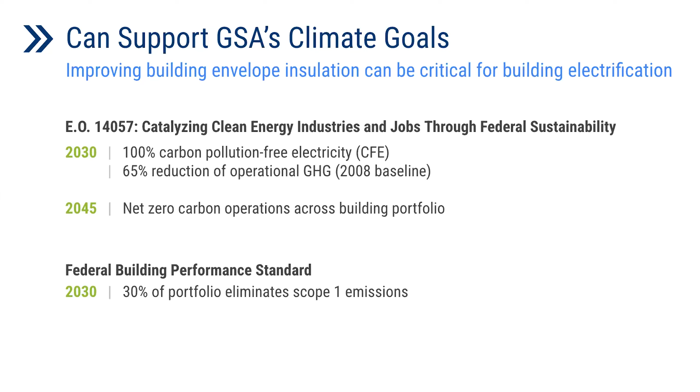Thank you, Aaron and Andrea, for the introduction. My name is Edward Louis, and I'll be presenting the research and findings from this project. This project looked to evaluate these ultralight insulating panels that are mounted on the interior side of primary windows. The design of this ultralight insulating panel strives to maintain the native operability of the primary window.

As Aaron said, improving the performance of windows is super important. Windows have a very long life on buildings, but replacing the primary window is often extremely costly and logistically challenging to do. So even though we know they are a thermal hole in the wall, doing something to improve and reduce that heat loss or heat gain through those windows is often very challenging because it is so expensive. So everybody's looking at how to improve this thermal hole in the wall in a more logistically feasible, more cost-effective way.

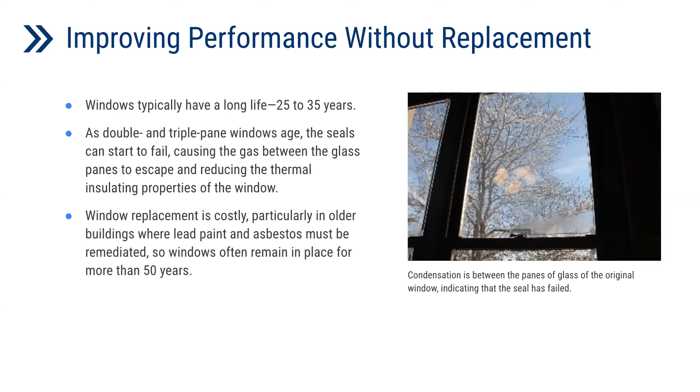So this product is, as you will see, another feather in the cap of solutions that can help achieve that goal. One thing to note is that even though windows have really long lives, particularly the earlier generation of windows - those that are already 25 to 30 plus years old, even if they're double pane or perhaps even triple pane - those early generation windows have seals that are probably starting to fail. As a result, the real world performance, even though you physically see double pane, may not be at double pane performance anymore.

Here's a more detailed look at how this insulating panel works. It operates by attaching 4 corner adhesive tabs that have a mushroom head style Velcro surface on them. Those adhesive tabs are mounted onto the interior glass surface first, and then this insulating panel snaps onto those mounting tabs to secure it to the window.

In a future slide, we'll see that the thickness of this panel is also quite thin, so the clearances enable the window to remain natively operable, which can be really important for certain buildings that need it for egress or climate control.

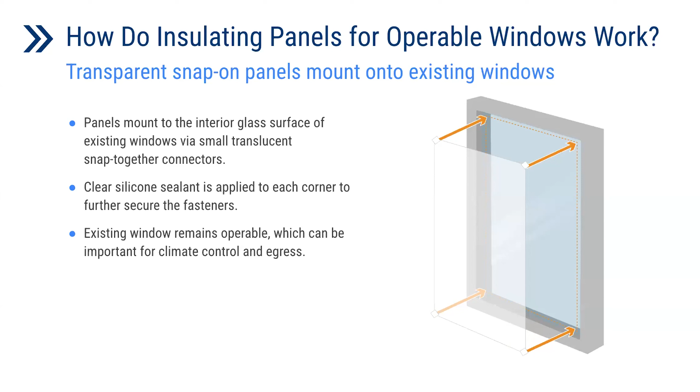The material of this insulating panel is really thin. It's a 20 mil copolyester plastic. When you touch it and feel it, it's analogous to a clamshell takeout box, clear takeout box type plastic. It's about that thickness, maybe just a tad thicker.

The manufacturer, WexEnergy, makes 2 versions of this insulating panel. One has a tint applied that reduces solar heat gain, intended for warmer climates where it's desirable to reduce solar heat gain and increase the insulating value of the glass surface. This project tested the clear version, designed for colder climates where it's desirable to maintain solar heat gain to help reduce winter heating needs.

In the future, this manufacturer plans to make this product from recyclable materials. Currently, it's already made 100% in America. So in terms of sustainability, this product has good sustainability goals.

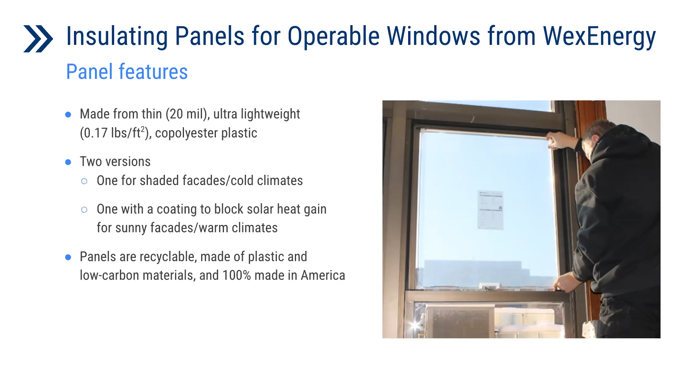Here's an edge view to show how thin this product is. The high profile version that we tested creates a 0.5 inch gap between the panel and the window. Why 0.5 inch? That happens to be the ideal gap or airspace for air-filled insulating. The insulating panel creates a dead airspace between the primary glass and the insulating panel, and if that space is filled with air, the optimal gap for reducing thermal losses or maximizing the insulating value of the panel is 0.5 inch.

One of the cool things about this panel is that it mounts to the glass. So if you have an operable sash and a fixed sash, they're oftentimes at different planes from a certain fixed plane. By mounting to the glass, each individual insulating panel is always optimized at that 0.5 inch gap, which is quite nice.

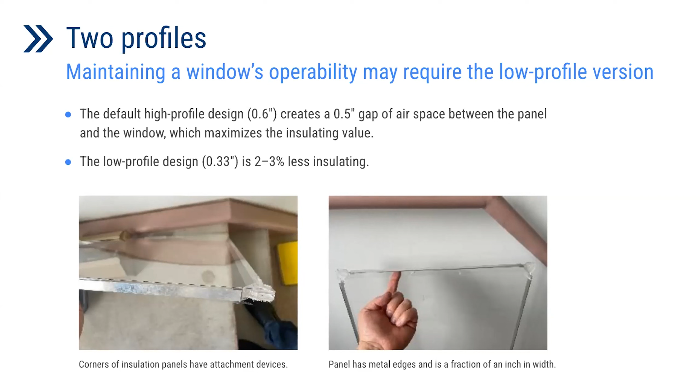They also make a low profile version, which has a slightly suboptimal air gap, and that does affect the insulating value a little bit. But the low profile design is available because some windows need that low profile design in order to have the clearances necessary to maintain native operability.

As I said, the real goal in improving the thermal performance of windows is to seek solutions that you can execute easily or economically, and some of that has to do with logistics. Many buildings are occupied, so they have furniture and people, and if you need to transport something very large into the building, an occupied building can be very challenging to retrofit.

One of the advantages of this technology is that it mounts onto the glass surface. As you can see in the upper right picture, this particular window is actually comprised of multiple glass pieces that are smaller than the total window size. In the window world, that's called multiple pieces of glass that have been muntined or mullioned together. By attaching to the glass surface, each individual insulating panel can be smaller, using the adhesive tab and then snapping that panel into place.

It's a fairly easy install, involving few tools. The GSA staff that did the install took about 10 minutes per panel, including getting the panel to the right place, putting on the adhesive tab, prepping the glass surface for the adhesive tab, etc. They commented that it's probably easier to install than other technologies because it is light, and you can do it even when there's furniture around the window.

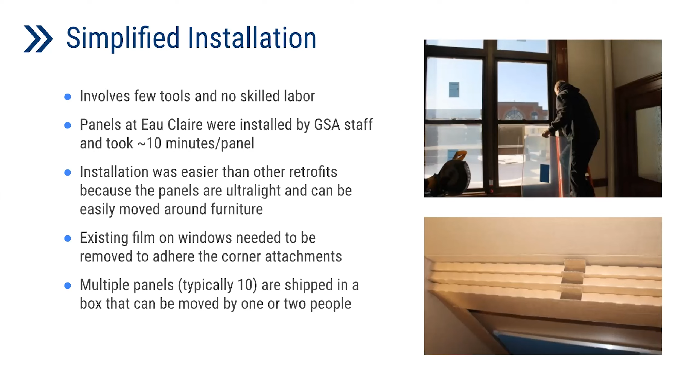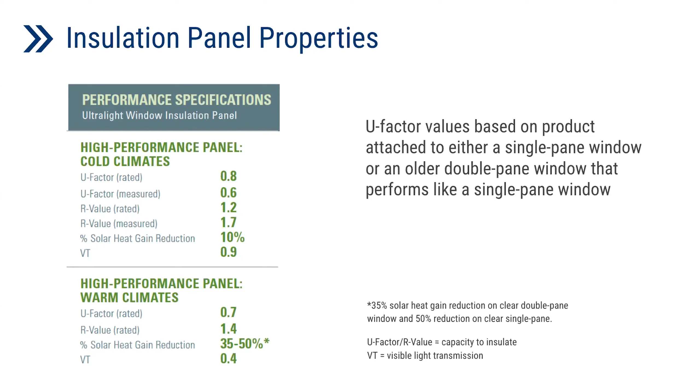So here's some of the performance of this insulating panel. We have, in the cold climate panel, both the manufacturer's rated performance that they did with Intertek, an independent rating agency, and also the measured values — we'll get into later how we measured in-situ U values. The R values are just the reciprocal of the U values. The manufacturer's performance for the tinted panel, designed for warmer climate, is shown in the lower part. Note these values are based on the product attached to either a single pane window or an older double pane window that now performs close to a single pane window. So these are not the performance if applied to a brand new double pane window. Keep that in mind.

We'll go to the next slide. The test facility was the Federal Building and U.S. Courthouse in Eau Claire, Wisconsin. It's a historic building, built in 1909, 37,000 square feet, listed on historic places. The windows in this building were replaced in the 1980s with double pane windows, metal frame, and a decent number of them have failed seals. You can tell the seals have failed — at certain times of the year, they fog a little bit. That's one of the telltale signs. This building is located in cold climate zone 6A.

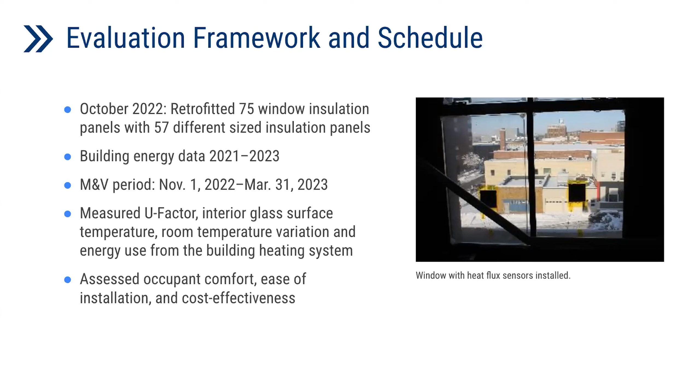Next slide. In October '22, 75 insulating panels were installed. The building has quite a few different window sizes, resulting in 57 different sized insulating panels. The measurement and data spanned 2021 to 2023. We set up sensors to measure the in-situ, real-world U value. On the left-hand side, we're measuring that U value with the insulating panel plus the primary window, and on the right-hand side, we're measuring the U value of the original window without any treatment.

Next slide. And here's the results of the in-field U value measurements. What we found is that the double pane, air-filled windows have a U value around 1. That's surprising because that's not normally the U value of a double pane window. But as noted, these windows are getting old and the seals are failing, and when moisture gets into the air-filled gap between the two panes of glass, the U value increases dramatically. So these double pane windows are actually performing closer to single pane. But with the insulating panel attached, the improvement in U value is about 52%. So a great improvement, and that's what we found.

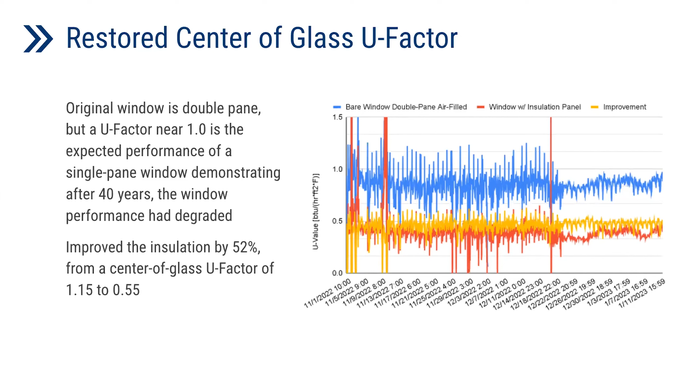Next slide. This building also has interesting building controls — it has a very aggressive nighttime setback, into the upper 50 degrees, which is a significant drop from your typical 72 during the day. That creates a very interesting natural experiment we can look at: how the perimeter rooms cool off and the rate of cooling. We found that once the insulating panels were installed, the rooms cooled off slower because the heat loss through the windows is slowed down. That decrease in the rate of cooling was about 31% during the winter months.

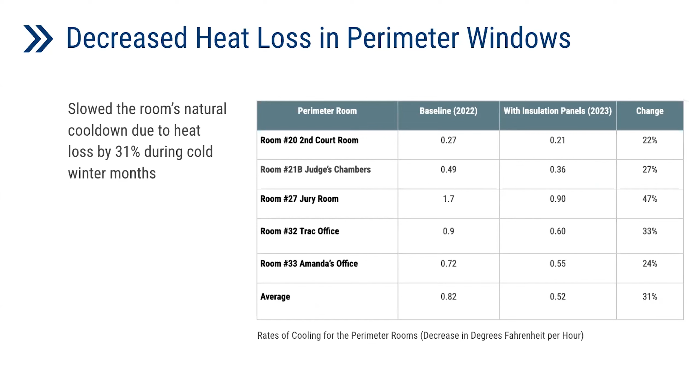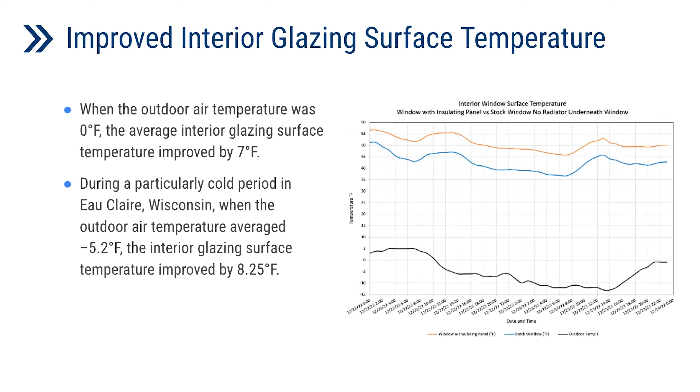Very interesting. Next slide. We also found improvements in the interior glazing surface temperature. With the insulating panel, the interior glass surface temperature was warmer by about 7 degrees when it's 0 outside. On a day when it's -5 outside, the interior glazing surface with the insulating panel attached was warmer by about 8 and a quarter degrees. We can go to the next slide to understand why this is important.

Interior air is warm, and that warmer air also has higher humidity, which comes from humans breathing, sweating, washing hands, etc. — even your coffee mug releasing humidity. And that humidity will find the coldest surface in the room to condense.

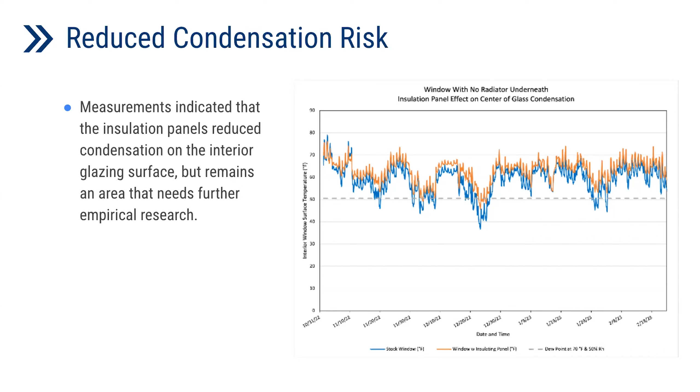The window glass surface is often the coldest surface in the room, and if you can warm up that coldest surface, there's a reduced chance of condensation. That condensation, depending on the material around the window, if it's wood, can damage wood finishes and wood trims. So by reducing condensation around the window, you can improve durability. And sometimes if that condensation dwells for too long, you can actually get mold, so you might also see a reduction in mold around the window from the warmed up window surface temperature.

Next slide. So how do these products look?

One of the things we found is mixed results, and we weren't able to ask detailed questions from the occupants who took the survey on why they answered negatively or positively, but we can speculate.

The test products included new features that, when these insulating panels were delivered to our pilot test sites, were not in full production yet. The pre-production versions were 3D printed, and the 3D printer could only make these elements using a milky white material. So the mid-span support for long edge length panels was 3D printed — you can see that tab in the upper right picture. Another new feature was the cutout around window locks, also 3D printed using milky white plastic. These contribute to a visual drawback to the insulating panel that would not be there in a full production version.

Speaking right now, these features are in full production. So if you were to buy a panel today, they would be made out of clear plastic.

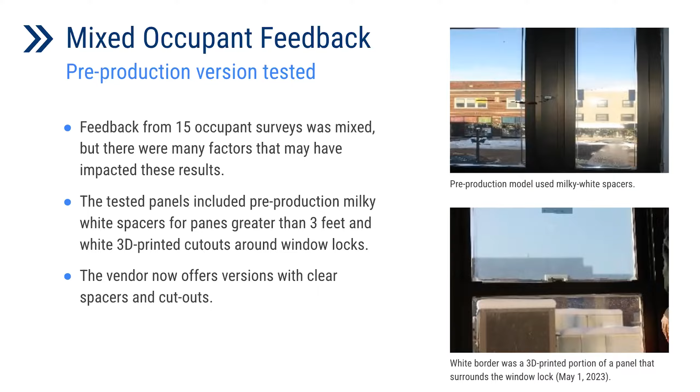Next slide — we can look at the difference in a full production version. In the case of a mid-span support, on the left-hand circle, you really don't see that mid-span support anymore. The manufacturer delivered a sample of the full production version midway through the research so we could get at least one full production version of the panel to look at. It's a big change from the pre-production version.

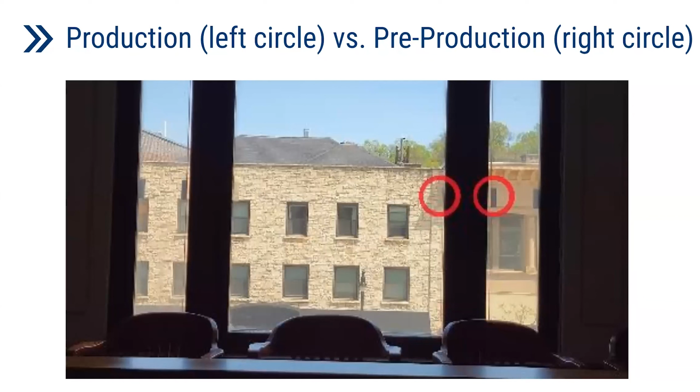So the mixed aesthetic survey results might be improved if you were to buy this panel today. Next slide.

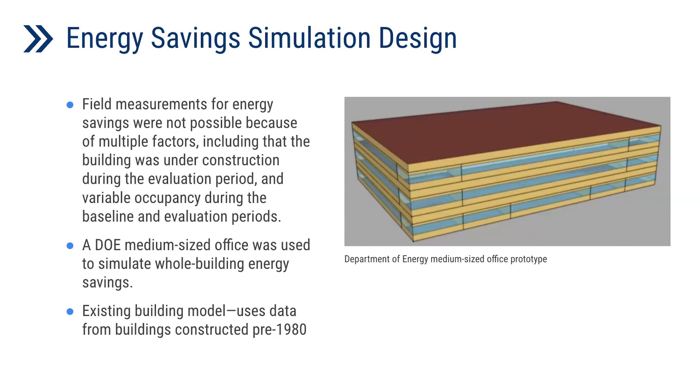We did have the instrumentation, and we collected utility bills to assess whole building energy use before and after. But due to changes in occupancy and some construction going on in the building, the energy savings of the insulating panel was lost among the other things going on. So we also used energy modeling to assess the energy savings of this product. We did the modeling using the DOE medium-sized office building model, specifically the version designed to model the prototypical building constructed pre-1980.

Next slide. The results are a range, because it depends on climate zone, and on what the primary window is — is your primary window single pane or double pane? And is your primary window frame metal or non-metal? This matters because this technology mounts onto the interior glass surface of the window, so it doesn't do anything for the window frame. If your window frame is made out of metal, which conducts heat really well, then your energy savings will be less. We also did the energy modeling with different percent frame area, since some windows have fat frames and others have thin profiled frames, which affects the percentage of glass surface that can be treated by this product, and that also affects whole building energy savings.

Accounting for these different factors, the whole building energy savings is between 2 and 7%, which we found. That seems like a really low number, and it kind of is. But one thing to note is that the medium office building model makes exterior envelope improvements look less significant, because it's a building with a lot of internal volume, so the surface area to internal volume ratio is not that great. Whereas in a residential home, where the internal volume is a lot less compared to the surface area, exterior surface area treatments will result in greater energy savings. So keep that in mind.

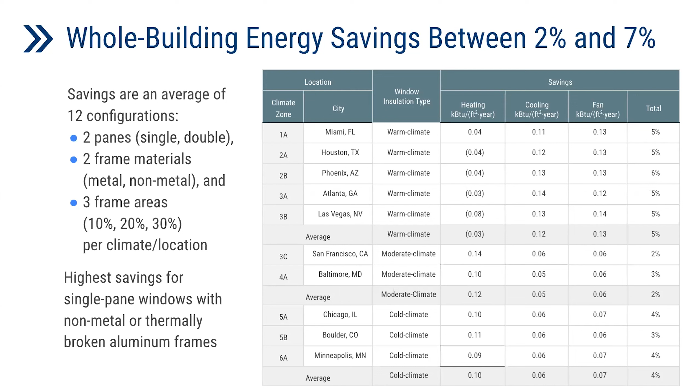Interesting, what we found in the modeling is that the warmer climate has favorable savings to investment ratios because the tint on that product reduces the solar heat gain and makes a significant improvement in the air conditioning loads, in addition to the insulating value it provides. In moderate climates that don't get a whole lot of heating and cooling load, the product really struggles to perform well in the savings to investment ratio. And in cold climates, we hit a savings investment ratio on average of right at 1.

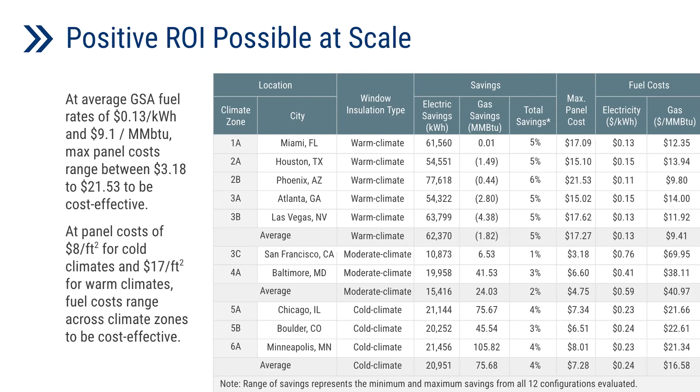So some of the lessons learned: in moderate climates, when there's not a lot of heating and cooling load, you need some really inexpensive envelope treatments in order to be cost effective.

The manufacturer of this product is also quite concerned about mounting their insulating product to windows that already have aftermarket tint films applied to the interior glass surface. The concern is that if the adhesive tab in the corner was mounted to the film, the weight of the panel could over years pull off the glass surface—not because the tab can't hold onto the glass, but because it's actually the adhesive between the tint and the glass that's failing, leading to the insulating panel failing.

We did not observe that in this research project. We had a very small number of windows that had tint film applied. An effort was made to remove a tiny corner of tint off the first window that had tint film applied. It was very difficult to remove, indicating that in this particular test building the tint was very stuck onto the window.

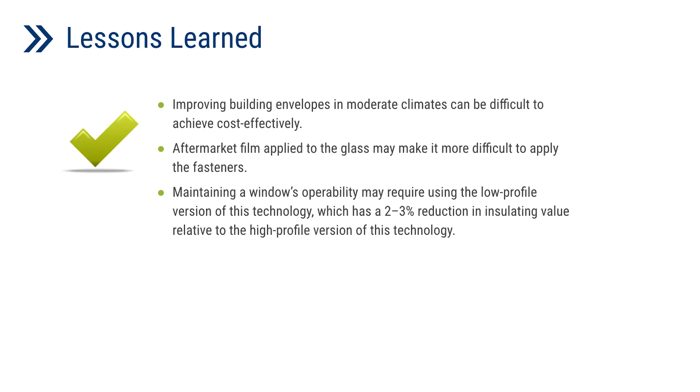So some other best practices: site-specific evaluation. As I said at the beginning of my presentation, there is a plethora of insulating window technologies that can be applied either to the interior or exterior of the window to improve thermal performance. And we really need to improve the thermal performance of windows.

So the solution is likely going to be a hodgepodge, different sites using different window improvement technologies due to the different characteristics of the windows. Some sites might have many windows with multiple glass lites that have been mullioned and muntined together. Others have really leaky operable sashes where the air leakage at the meeting rail needs to be reduced.

Some sites may not have any problems with moving a very large insulating panel that covers the whole window from frame edge to frame edge, versus others, they may have extreme difficulty getting such an insulating panel into place. So it's very site specific.

One thing we discussed with the manufacturer is, if the measurements are taken incorrectly resulting in an insulating panel that doesn't fit, who has to pay for the remake? Through that discussion, the result was that it's best to get the vendor to take the measurements. That way, if there's an incorrect size, they would be responsible for remaking the insulating panel. That's probably a good idea, not just with this manufacturer, but in general.

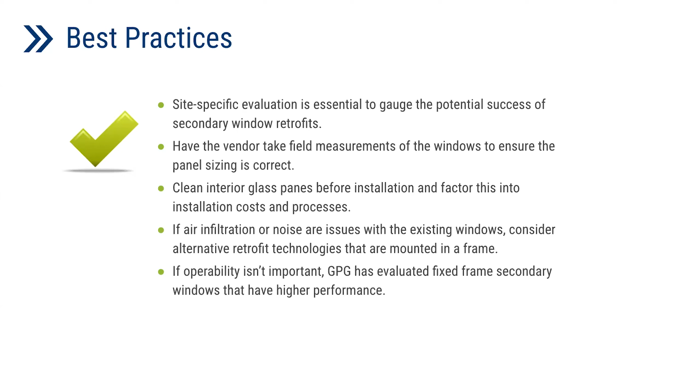And if operability isn't really important, that might also trigger the move to a different technology that has higher thermal performance. Those other insulating technologies do exist if operability isn't of primary importance. Next slide.

Some other recommendations: this particular technology, especially the cold climate version, which is clear, does not impact the street look of the building.

If you were to install an insulating panel technology that has a tint or some sort of low-E coating, you could potentially affect the curb appeal of the building, and that might run into historic regulation issues. So it's one of those trade-offs again.

When you have a tint, that changes your solar heat gain. If you have a low-E coating, that improves the thermal performance of the insulating panel. But can you get that passed through your historic building committee?

I don't know. So this particular technology, in the cold climate version, doesn't change the street facade of the building. It's particularly good for single pane or older double pane windows with non-metal frames or thermally broken aluminum frames, because it treats the glass surface only, and you get the most improvement to the glass surface when it's single pane or double pane that has started to fail and therefore operates closer to single pane performance.

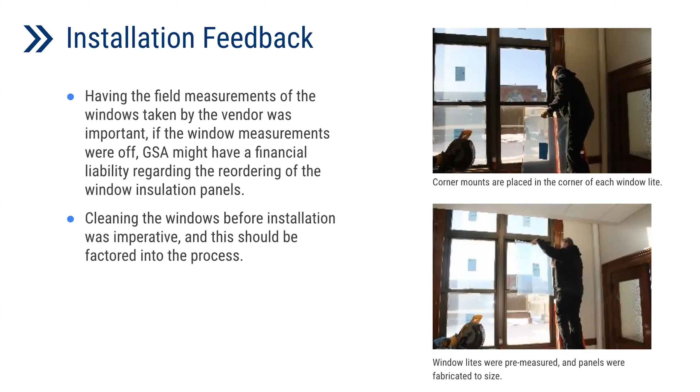Cleaning was also imperative. We discussed earlier the film, but also in general, because you're adhering something to the solid face of the glass, it's important to clean it before you attach the adhesives. So those are two things you should factor into installation. Next slide, please.

So overall, as we discussed, the view didn't really change. Obviously these are relatively very clear, the visual transmission is quite high on them, so the view didn't change at all.

We did receive some feedback. We administered a survey to the building occupants. They did move around in the building during the construction process, and during our evaluation period there was also construction in the building, which caused some people to be relocated to new offices, so some of their views did change because of that.

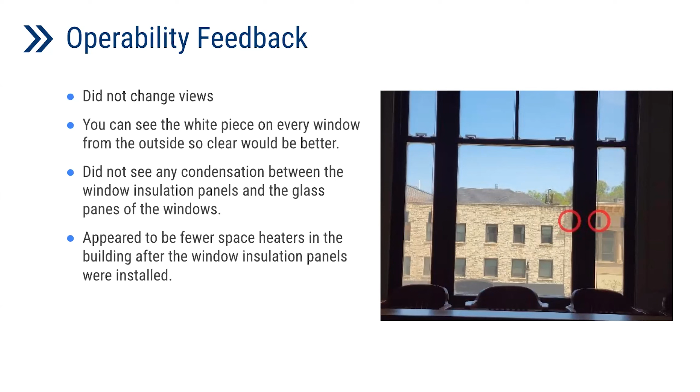But the big comment overall was about the corner pieces where you're actually attaching it, and also the spacers, which are shown in this picture here, and then there's the bullet I included at the last end. Fewer space heaters were on site after the post-window installation. Next slide, please.

Yeah, and now some of these windows are very large and quite heavy to open, but they still liked the idea of being able to operate them, though we did try to inquire how often they were operated, and it is very low.

But because of the way the two panels worked, the two windows worked, the top panel, as shown in this picture, had to be removed so the lower window could be opened. That was considered a hindrance by a couple of people in the building, just because they would have liked to be able to open it how they wanted. With a small reduction in savings, the lower profile insert may have been the better option to go with, allowing the windows to pass, but that wasn't evaluated at this time.

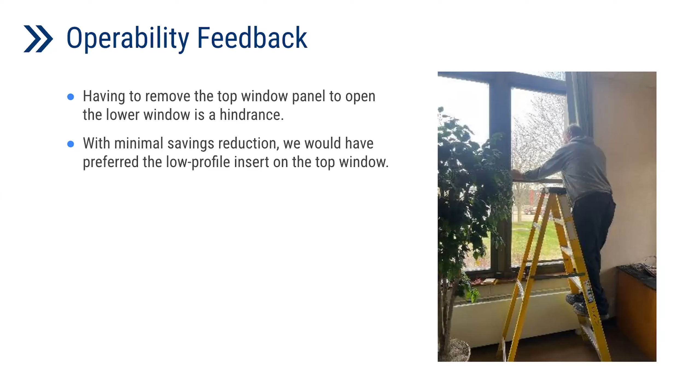Next slide, please. Again, really the idea is, if you ask someone, do you want to open your windows, they're always going to say yes — the idea of having some fresh air.

And again, the picture shows him cleaning off the glass where we adhered one of the meters. They're quite heavy, at least in this office. Not all the windows are the same size, but these windows are large. But they like the idea of opening it, and that is the value of the technology.

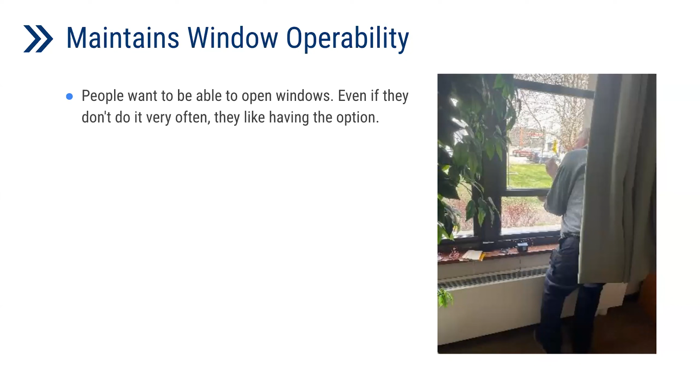Taking off the panel in that picture, other than the ladder, took all of about 2 minutes. You can still slide it up with attachments on the window that hold the panel in place, so it allows for flexibility if you do want to open those windows. But overall, it still allowed for operability. Next slide, please.

And that kind of sums up just the experience by the building operators and the building staff. And now we have about 15 minutes to address some of your questions that you've been providing.

This is the exterior facade. I'll take this time while we're queuing up questions. Someone asked about historic preservation, and Edward mentioned it too. Because this panel is mounted on the inside, the SHPO office was supportive, also because it's not permanent. Other than taking a putty knife to scrape off where the attachments hold the panel in the window, it can relatively go back to its original form. These windows were installed in the 1980s, even though this is a 1930s building, so the windows have been changed once already. Overall, SHPO was supportive because it did not affect the exterior appearance, and on the interior side it had a relatively limited permanent effect, and could always be reverted back to the original shell.

Thank you, Michael. As Michael said, thanks for all your great questions. We may not get through all of them, and if not, we'll follow up with a follow-up Q&A. So with that, I'll jump into the first question: how does this panel protect against condensation?

The panel has edge seals, and by warming up the interior surface of the glazing, it helps reduce condensation, which happens when moisture reaches a cold enough surface to hit the dew point. By warming the interior surface that the air touches primarily, the original primary window surface is now protected from the air movement that brings moisture to that glass surface. You have a warmer new surface, the interior surface, and that warmer surface reduces the amount of condensation risk.

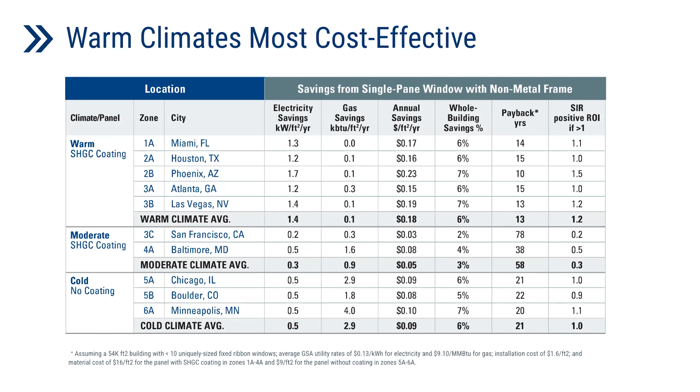Do we know whether the clear mounting points will degrade or discolor over time and need replacement? We did not do long-term testing. As you saw, the research period is only about a year, so we don't have that data. The manufacturer can maybe speak to that if they're on this call. If not, we can get back to you by email.

I think we'll respond to that in our follow-up Q&A.

Were there any thermal imaging of the treated windows pre and post? Yes, we did do some thermal imaging, and they did show on the thermal imaging a much warmer surface.

How was the film on this project removed by GSA staff? Are you talking about the blue film? The blue protective film is easily removed, it's like any type of packaging. No, they're talking about the post window laminate film. Unfortunately, I wish Dan was able to answer this question. I think it was a putty knife to remove, and once the sheet had come off in pieces, they cleaned the window.

Will cleaning agents damage the surface and reduce visibility over time? The manufacturer has instructions for the type of chemical to use to clean this, typical non-ammonia based window cleaning solutions, and they will not damage the product.